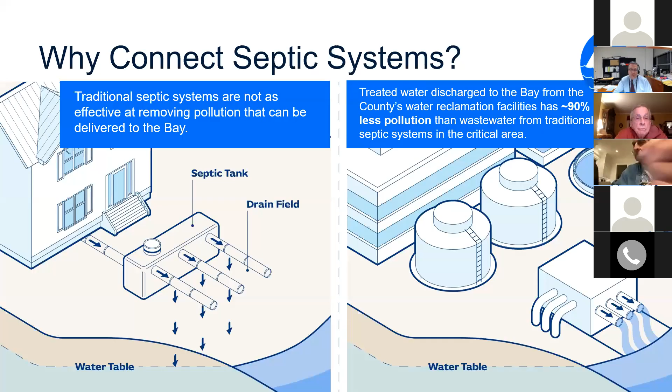Now there is treatment that goes on in the soil, in your leach field from your septic system, and that can be very effective for some pollutants, but it's not particularly effective for nitrogen. So most of this effort was really oriented around reducing nitrogen loads to the local waterways and the Chesapeake Bay ultimately.

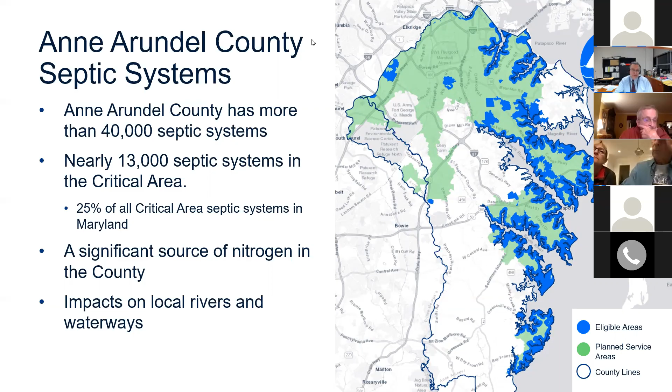So for the general public, what are the benefits? As I mentioned, there's less nitrogen discharge to the Chesapeake Bay. This program, if we're able to connect more septic systems, will help us maintain compliance with our Chesapeake Bay nutrient loading goals, and there will also be fewer nutrients and other pollutants in our local waterways.

One thing I think a lot of people probably don't realize is all of the county's watersheds and rivers are also listed as impaired for nutrients and other pollutants. So beyond just the Chesapeake Bay, the local waterways are also impaired.

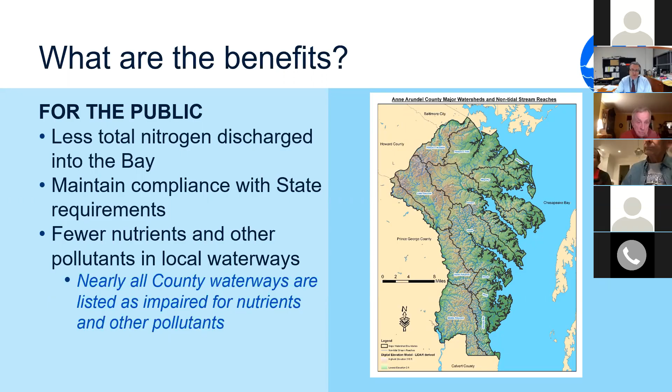And there are some benefits for the homeowner in a septic connection. These can be very site specific, so some of the things here may not apply to your situation as a homeowner, but we're going to go over some of those possible benefits. A lot of times the size of your septic system is related to the size of your house, so there can be restrictions on what you can do in terms of building additions that are tied to your existing septic system.

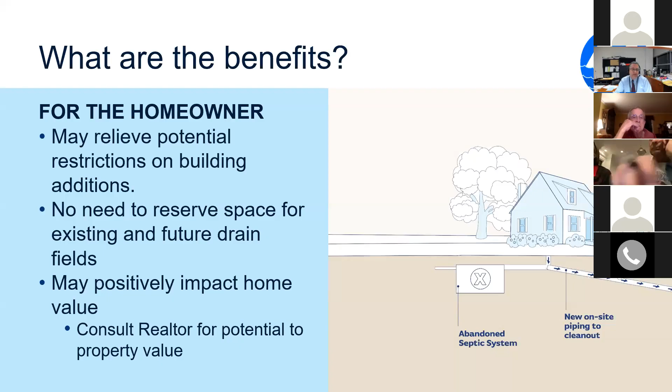You also need to leave room in your yard for a drain field, and usually a future drain field, and that can take up space in your yard that you can't use for other purposes. There can be a positive impact on the home value, though this is also very site specific. If that's something particularly motivating, we'd suggest you consult a realtor about possible property value impacts.

There's also, as I mentioned earlier, improvements to nearby waterways because that septic tank effluent is not going to be going in and eventually making its way into your local waterway. And you do avoid the costs associated with maintaining septic systems.

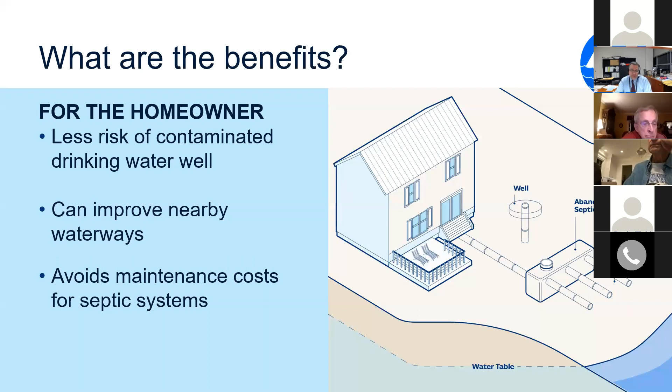So the main ongoing cost with the septic system is the pump out cost, which is a couple hundred dollars every few years. The more expensive work that sometimes needs to be done is when the drain field needs to be replaced, and that drain field replacement can be between $5,000 and $20,000, depending on the circumstances of your lot.

And in certain circumstances, you can be required to upgrade your system to a BAT system, but still the most costly component here is if you had to replace your drain field.

The BAT system we're mentioning here is called the best available technology, and that's a septic system that's been designed to promote nitrogen removal. It's more complicated from an electrical and mechanical standpoint because it's designed to promote certain microbial growth that will remove nitrogen, so there's a larger O&M cost because they consume more energy and require more maintenance.

And the drain field cost is about the same if you replace it, because the drain field component of a traditional system or a BAT system is pretty much the same.

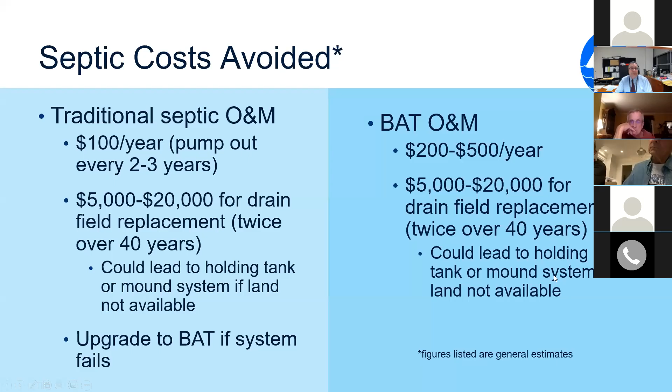So we had our overall need, which is to protect our waterways and improve the environment and water quality. We developed this process to try to facilitate septic connections, and we'll go over some of the changes. Our goal with this program was to connect 6,000 septic systems over the next 30 years, so we're targeting about 200 homes a year.

We have developed a procedure for neighborhoods to apply for consideration for a subsidy, and we'll talk about that in a lot more detail as we go further.

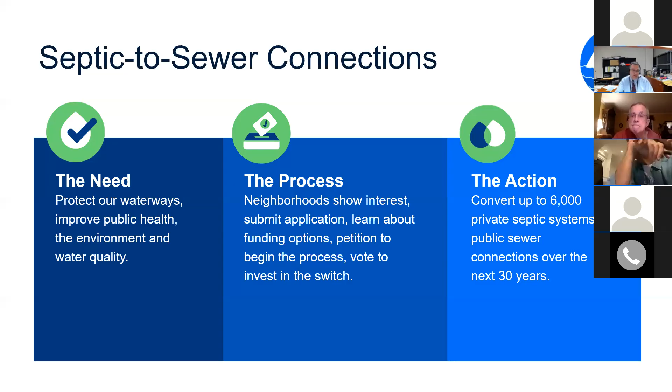So we'll provide just a little bit of background on the septic to sewer connection program itself. Earlier, almost 10 years ago, an earlier version of the Chesapeake Bay total maximum daily load was identifying nitrogen load reductions by sector. For Anne Arundel County in the septic sector, they were looking at about a 46% reduction in nitrogen, which would have meant connection of close to 20,000 septic systems out of the 40,000 countywide.

So we started at that time with a lot of conceptual planning to look at what areas might be possible, that might be close enough to the county's existing system to connect. We started a septic task force that met in 2017, 2018, and maybe into 2019 to get feedback. This was a task force of different people within the community, the business community, environmental representatives, and certain community representatives. We asked them for ideas and guidance on policies, prioritization criteria, and funding approaches and outreach efforts.

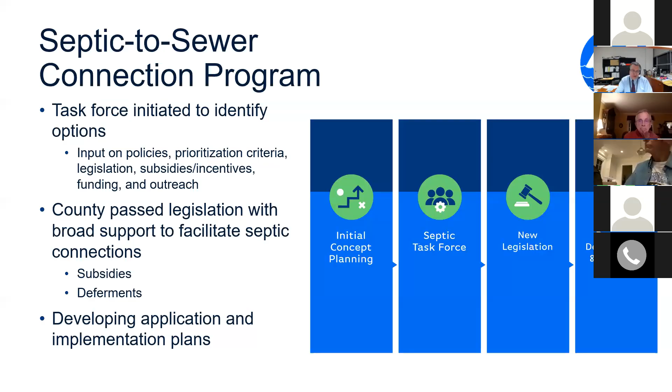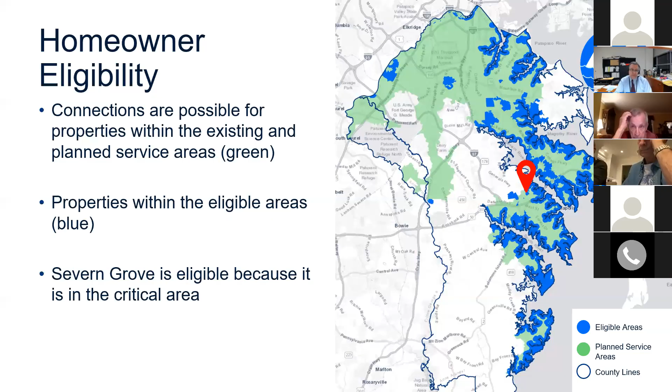Okay, next slide. So in this, we have a map of the Severn Grove Improvement Association and sort of where it sits with respect to the rest of the county system. So the way a petition project works is that the residents petition DPW for extension of sewer to their location, their project area.

So there's some constraints. There's some flexibility with setting up a project area, but there's also constraints. One of the key constraints is that we start from the county's existing system and we go back on a contiguous route into the area that's going to be served. So it means that if we were going to serve Severn Grove Improvement Association area, all of these other parcels that are shown would also be included in the project area as part of that petition. We'll have time to answer more questions as we go through the presentation tonight.

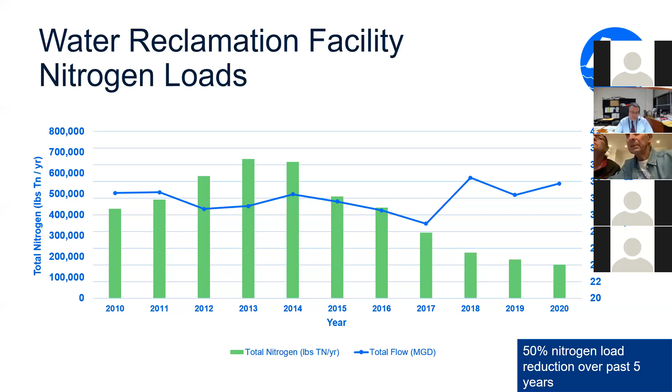All right, okay, thanks. Yeah, thanks, Ed. So I realized I just forgot to introduce Ed.

Ed Shea is with HDR, and HDR has been helping us with all sorts of aspects of the program, including helping with some of these layouts and the costs. And actually the next section I was going to hand it off to Ed, so I got a little ahead of myself. Ed's going to go through the funding and the costs, and hopefully that'll explain. I know we had a question about that, so we're going to go over that right now.

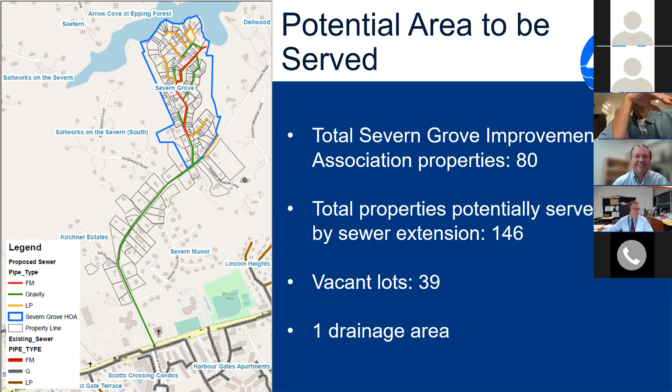Then we've got the on-site cost, that's the private portion. That includes abandoning the septic tank, constructing a sewer lateral, and we'll show that again in the next slide. Then the third piece is the capital facility connection charge, and that represents the county's investment in the WRF capacity to treat your wastewater. That's a fixed charge that tends to increase each year, currently around $10,000.

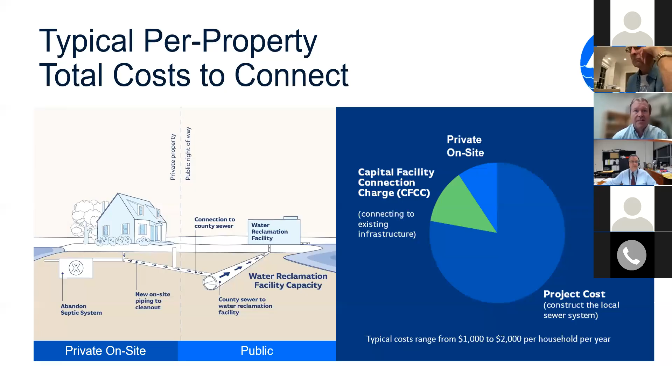That connects immediately on the other side to the trunk sewer in the street. And then there may be other on-site costs related to installing a grinder pump if that applies. So we'll go to the next slide and we'll talk a little bit more about these project costs.

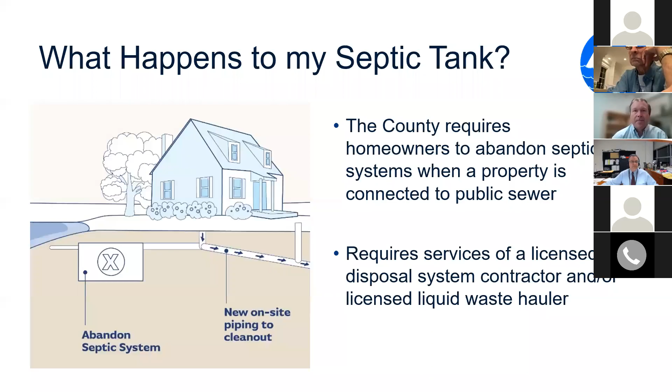And then there's going to be surface restoration. So the trunk sewer would usually be placed under the paved streets, and that would involve restoration of that surface after the sewer is installed, so repairing the asphalt roadway.

Are there actual figures associated with these diagrams you're talking about? Because I'm dialed in and can't see anything. Yes there are, and so when you are able to access these slides on the website, you'll be able to see the graphics that accompany this description.

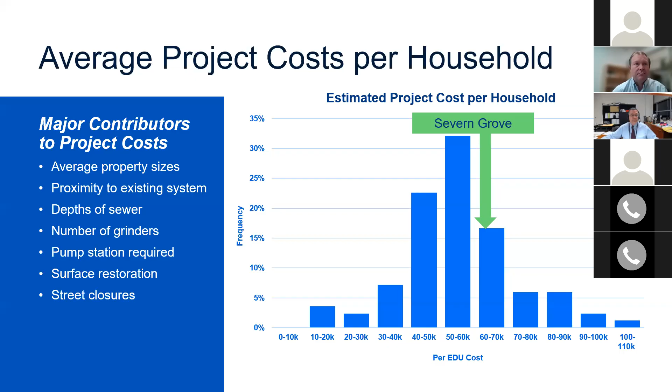So this is what you could usually expect. In some cases, if your home is set back further from the road or the right-of-way, you might have a little bit higher costs, but in most cases, you could expect this to be less than $10,000.

So we'll pause there and take any additional questions we have in the chat box.

There is one question about where the pump station would be located. So this, of course, depends on the actual project area that would be defined, and as George described, we don't have a preconceived project area. But hypothetically, based on the area shown in the map during preliminary conceptual planning, the pump station might be located closer to the back of the community by the creek. So that's what you typically expect, that the pump station will be located in a lower lying area, because you're pumping the flow back up to get over a ridge towards Severn Grove Road, where the sewer would ultimately go.

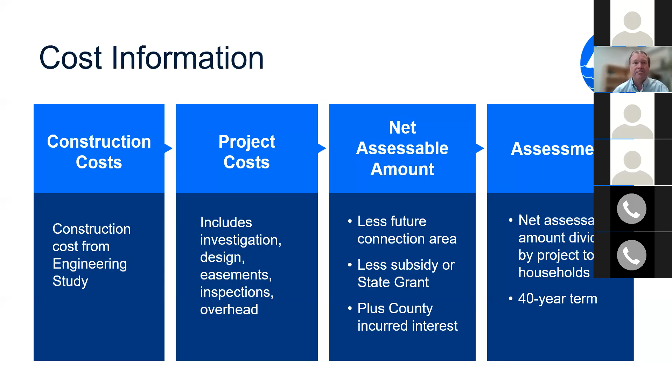The other $15,000 would be used for the on-site costs and the CFCC. So the objective is to eliminate the upfront costs for most households. Those on-site costs would be funded through the BRF, and then the focus would be on paying the annual assessments.

Again, for households with income greater than $300,000 a year, only half of the county subsidy is available. And with the BRF funding, it's $7,500 instead of $15,000 for those on-site costs.

There's an option to defer up to 50% of costs for everybody, no matter household income. We've got an example on the upcoming slides of how that works. There's also, for households that qualify as elderly and low income or permanently disabled, an option to defer 100% of costs. For vacant lots, these features of the program are not available.

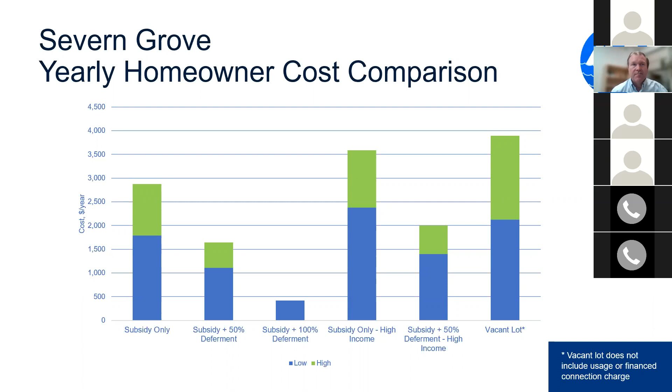The capital facility connection charge should also be covered with the Bay Restoration Fund grants, but you do have a choice to finance that cost over 40 years. The annual assessment is paid over 40 years, and you have the ability to defer up to 50% of that cost, with the balance due at the sale of your home or at the end of the 40 years. I'm going to hand it off to Julie, who will explain the deferment with an example.

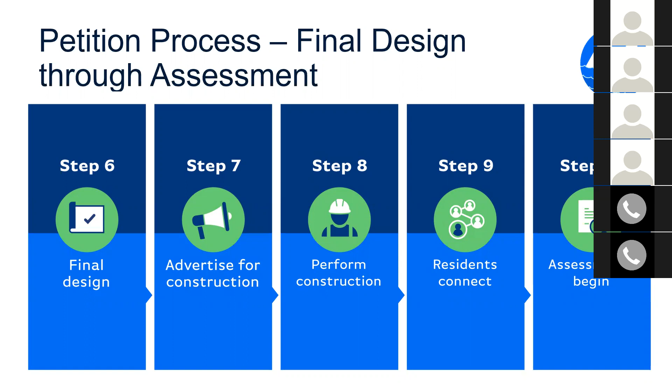So the next step - let's just go over the next steps, and then I think we have a couple more questions, and then we'll get caught up. So the next step, if there was further interest, would be for...

I thought the next one was about the application. Sorry, I got myself off track. So let me back up, I jumped ahead of myself.

So we've set up a community page on the ourwater.org website where we're going to post the slides from tonight's meeting. A recording of tonight's meeting will be on there in about a week. We'll also put some other information, some of the notes we've been taking, and some pictures of the grinder pump system, since we've talked about that a little bit and we didn't have it in our slide deck.

On that page, there'll be information related to the presentation tonight, but you can also say whether you're interested or not interested, and you can leave a comment as well. And the next step, let's go to the next slide, which would be to turn in an application. The application, as I mentioned, it's not particularly rigorous.